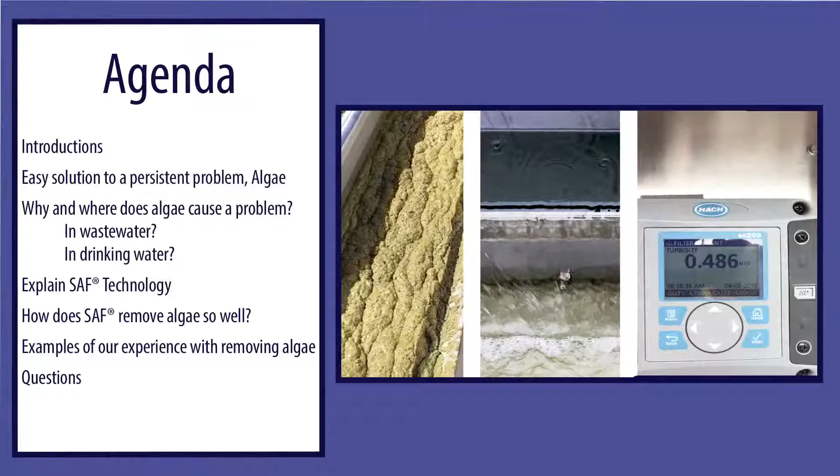We're going to do today a presentation on municipal algae and industrial biosolids, and I think that kind of goes back and forth over the next few days. So we look forward to hearing your questions.

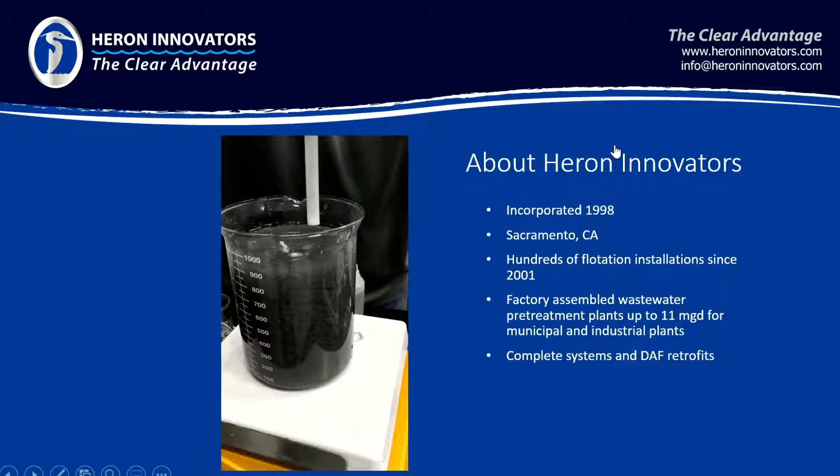This jar test, I'm going to start this. That's a tube coming from a lab unit, and there's a little bit of coagulant, a little bit of polymer in that jar, so we've got a pin floc. That tube is injecting a charged microbubble froth. As you can see, we've got a very high capture rate, a very fast rise rate, and a very stable float.

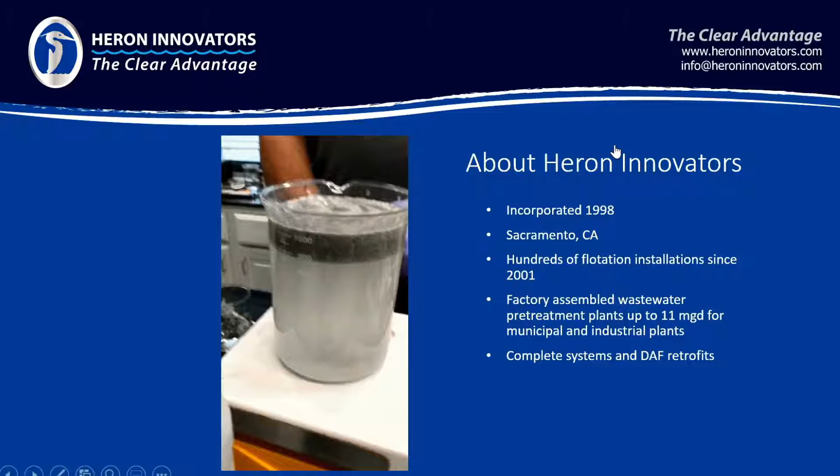That caught my attention, as well as the other people in the room, which happened to be the environmental manager from this company. So we went around and started checking out SAF, and that company today has 9 SAF installations throughout their operations. So it all really caught our attention, and of course I ended up going to work for Heron Innovators a few years after that—I was that impressed with the technology, and it did a good job.

When this stream re-enters the float cell, you've now exceeded saturation, so the little soda pop bubbles come out of solution and work to float those flocculated solids to the surface, to be skimmed off and usually disposed of. That is basic dissolved air flotation. The technology's been around 100 years. There are different designs—other technologies called induced air and cavitation air—but bottom line, it's simply putting bubbles in, and there's nothing really special about these bubbles.

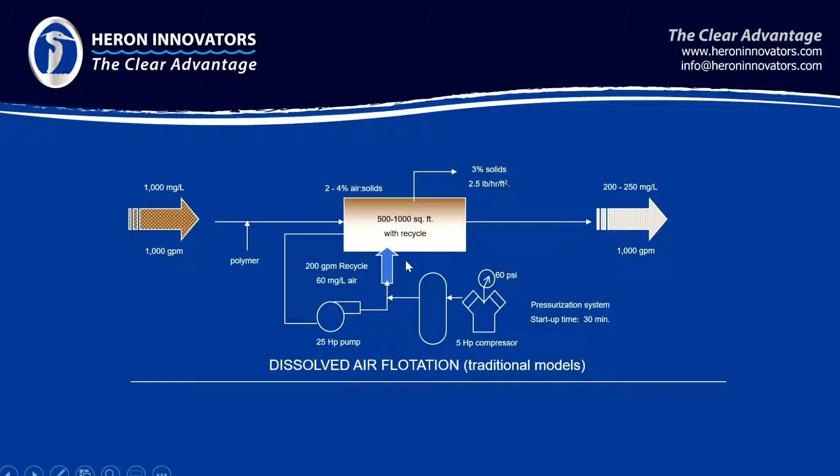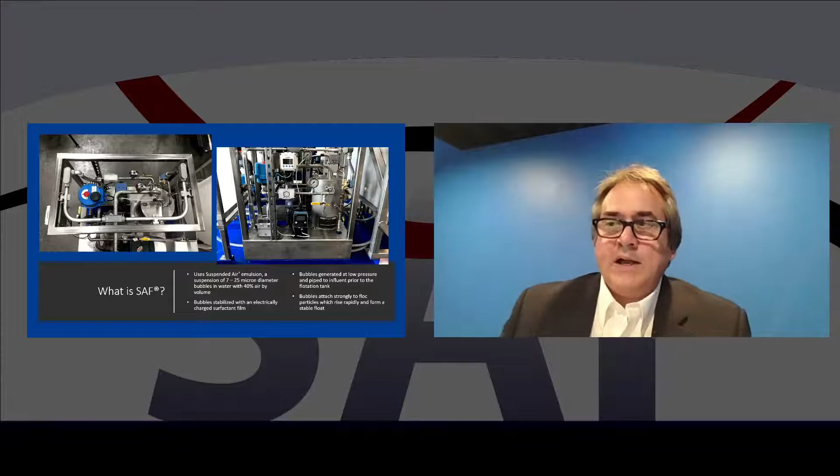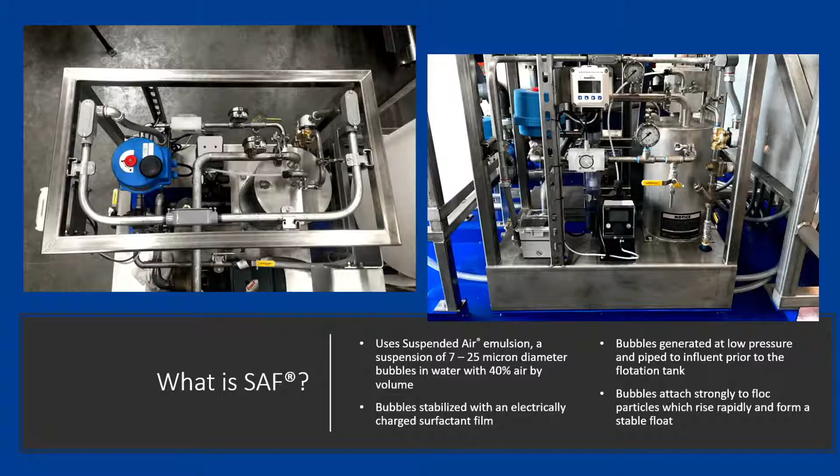So SAF is really entirely different. In fact, there's no dissolved air involved with SAF. Instead, what Heron is doing with the SAF technology is creating this charged microbubble froth, and this froth is 40% air by volume. That's going to be injected at this point right here, into the influent, where it's stirred in.

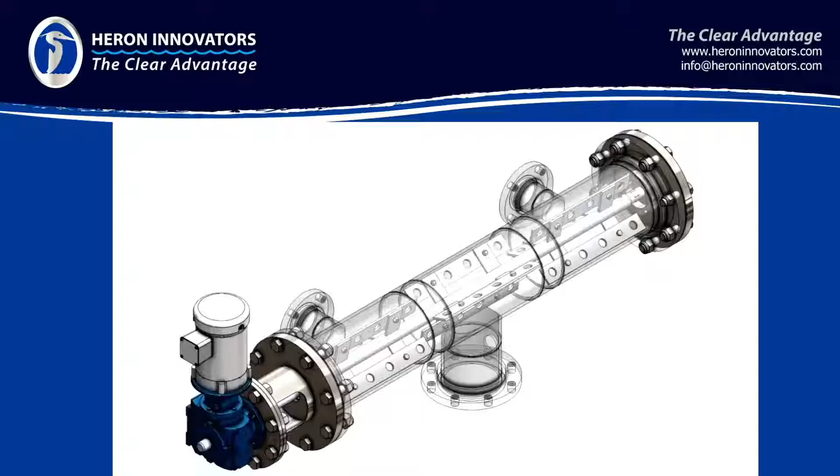There's actually no more air that goes into the flotation cell at all. We get an air-to-particle reaction right here, where the bubbles jump onto the solids. It's stirred in with a device that looks like this — the froth is injected here, influent coming in, and we've got these paddles turning maybe 10 to 15 RPM. This gives a very gentle stirring of that froth, just enough to get a good mix without shearing the floc created by the chemistry upstream.

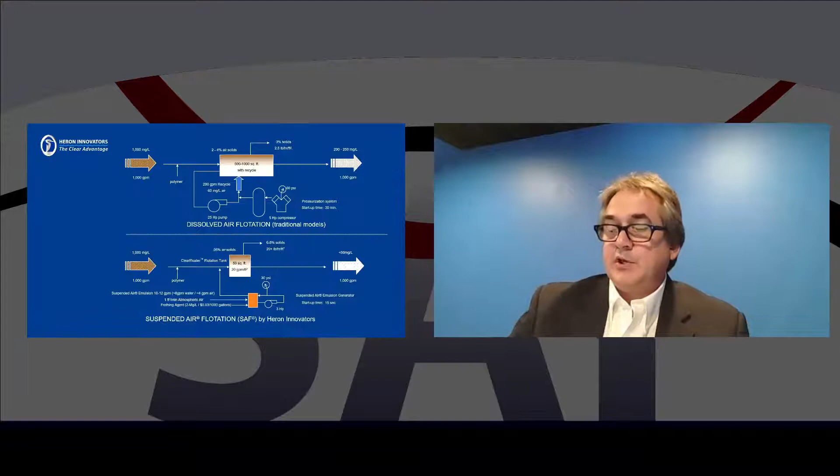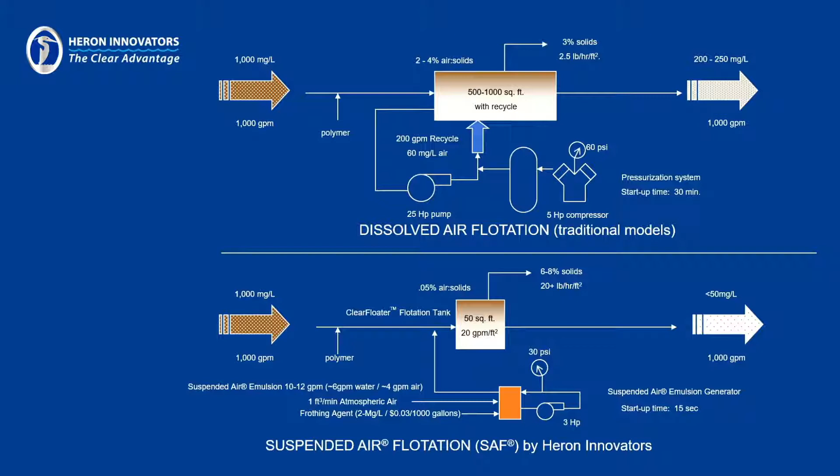Beyond that, what makes SAF such an incredible separation is the mechanics of it. At first glance you'd think this just looks like another flotation technology, but when you really get into the mechanics of how these bubbles work, it's very different. So John, I'm going to kick this back to you — can you explain why those bubbles have such an affinity for the solids?

We make something in our SAF generators called an Aphron. Aphrons were patented in the 70s by Dr. Felix Sebba and three of his partners — I think that was the University of Virginia, though I keep getting South Africa mixed up. I'm not sure where that actually happened, but there was a patent in the 70s. The issue at that point was these bubbles weren't able to scale beyond that lab unit, and that scaling was our accomplishment.

The bubbles have an advantage over a DAF bubble in that they have a surfactant sheath on the outside, and that sheath provides surface tension advantages over a DAF bubble. We learned how to harvest the 7 to 25 micron bubbles, but really it's that sheath on the bubble that gives us a surface tension advantage. Combined with the charge advantage — we have an anionic or cationic surfactant, so there's an electrostatic affinity — we get about 1,000 times the affinity for a particle in solution compared to a naked bubble that a DAF or other IAF may generate.

That attachment achieves two things, which we'll talk about a bit later. That small bubble charge and getting so much air onto the particle acts a bit like a coagulant, so we end up using a lot less chemistry, and using the chemistry we have far more effectively. Almost every installation we're getting above 95% removal, when competing technologies are even as low as 70%, sometimes even 80%.

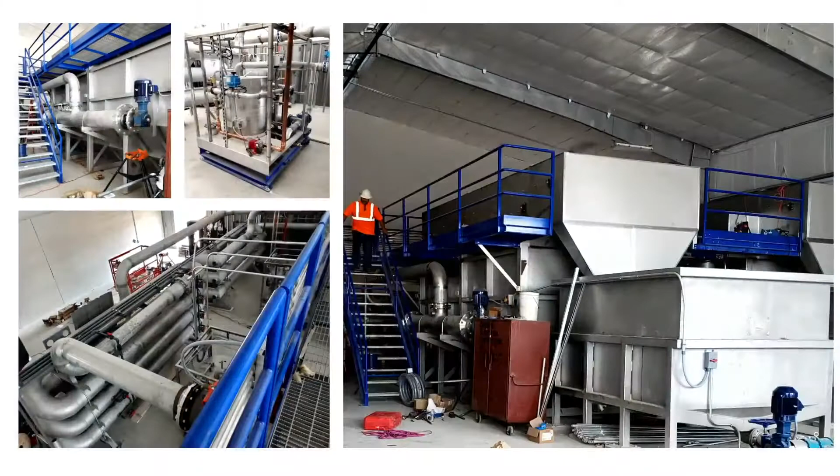On the upper left-hand corner of the slide you're looking at what we call a floc mixer — that's the pipe running along the side of what we call our float cell, or clear floater. That mixes in the microfroth created by the SAF generator, which is to the right of it. The reason we need that floc mixer is that in a DAF environment, where you're recycling 15, 20, 30% of the water, that water's going to mix.

We normally have a recycle stream of 1% or less, and I need to mix that quickly without disrupting the floc, and that's why we have a floc mixer. One of the advances in the last several years is that the floc mixer used to be inside the tank, and now it's on the exterior of the tank. We find a much more uniform particle distribution size, much more consistent float, by having some control over the mix energy before it goes into the float cell.

So the froth generator is making the charged microbubble froth, and then it's being injected. I believe on this unit, it's being injected right here, and then it's stirred in right here before it goes in. So there's really no recirculation after it goes into the flotation cell. Is that correct? That's correct.

So when I say recycle water, it's actually normally some sort of fresh water source. It's normally just a few gallons a minute, and it does contribute to the loading on the float cell, but nominally, usually less than 1% of the flow.

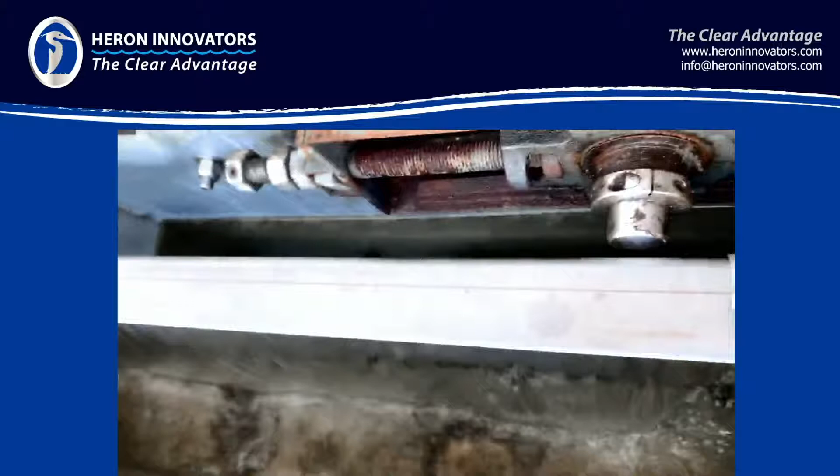So this is algae removal. You saw in the first part of the video where we had the solids coming up and we were skimming them off, and then the clarity of the water. That water, we have data, we run anywhere between—in normal wastewater you might see somewhere between 60 and 300 parts per million, which is usually what they make us warranty, so we'll use 300. I've never seen much above 100, but 60 to 300 parts per million, we consistently get between 0.2 and 0.8 NTU water on the discharge side.

Remember what I said about Title 22, where the Title 22 filter had to improve to make water better than 2 NTU. We are creating water to that filter of 0.2 to 0.8 NTU. So the filter just becomes kind of a stopgap, and it doesn't have the loading that it normally might see from other pretreatment techniques.

And with that, we have long cycle times. We have a lot less load and a lot less problems with the filter, and a lot less blinding, I should say. Okay, so we've got a chart up right now—I believe we've got several installations where we're making Title 22 water with SAF. Why don't you talk about a few of those?

Today, that same unit is, depending on how clean they want to make it, they can turn polymer down or up. But they keep that running right around 1 NTU and can easily achieve that—they achieved half NTU for several years running. And now they are playing with other polymers, trying to save costs, reducing the performance to get it to fall off to just under 1 NTU.

We have another installation at Pleasant Valley State Prison, and that unit gets consistently between 0.2 and 0.8 NTU, and the data I've seen for about 2 years now has been consistently at about 0.5 NTU.

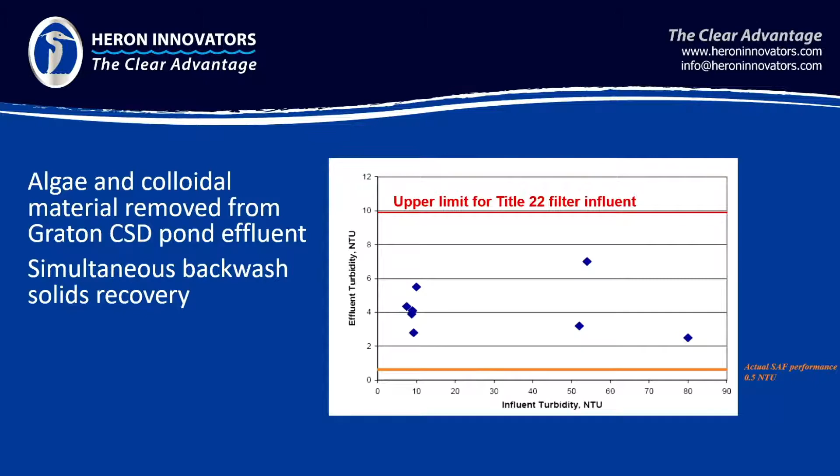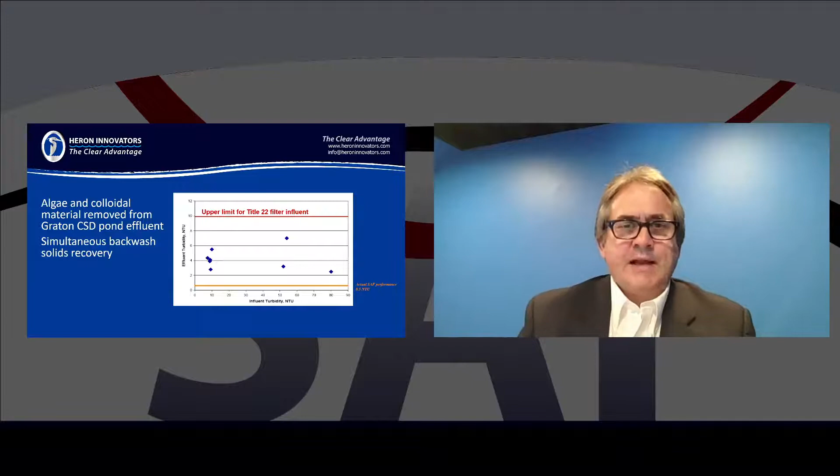I'm often at conferences, and I'm sure you are as well, John, where there are presentations given on algae, algicide, talking about different strains of algae. It seems like SAF is a really well-kept secret. In fact, I often want to stand up sometimes in those meetings and say, we've got a solution.

Let's talk pragmatically, where does this fit in a municipal plant? Well, right now, it seems unlikely that the regulators, the regional board, would approve a flotation technology as a Title 22 approved answer. So it always, the filter, everyone's got a comfort level with the filter, and that it provides a backstop to performance for any kind of upset condition that might eventually come about. So we are a pre-treatment to that Title 22 filter.

So in normal installations, we are downstream of some sort of retention pond that has already treated the municipal water and is waiting for distribution. That retention pond grows algae just by virtue of the fact that it has a little bit of BOD left in it, has a little bit of nutrients in it, and it sees a lot of sunlight. So it's in that pre-treatment step that we really perform, and we really outperform all our competition at that point, to the point where it's actually most operators find it easy to treat algae now, instead of, it used to be a very difficult process.